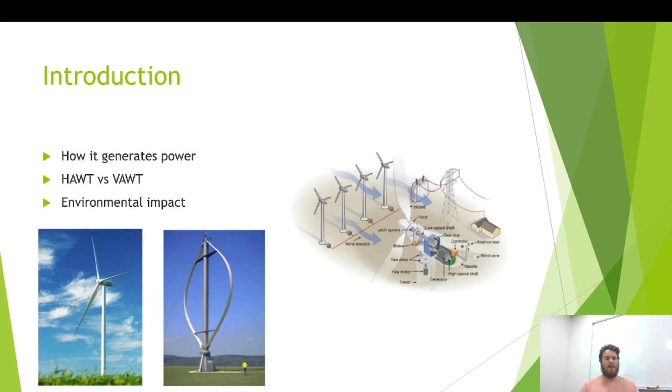So we had three original designs for our blades. As you can see, design one's on top. It was an 8-inch blade that uses airfoils that decrease in size as it goes along the length, with a 0.45-inch rod that connects to the hub. Our second design is more of a claw design that also uses airfoils that decrease in length as it goes to the tip.

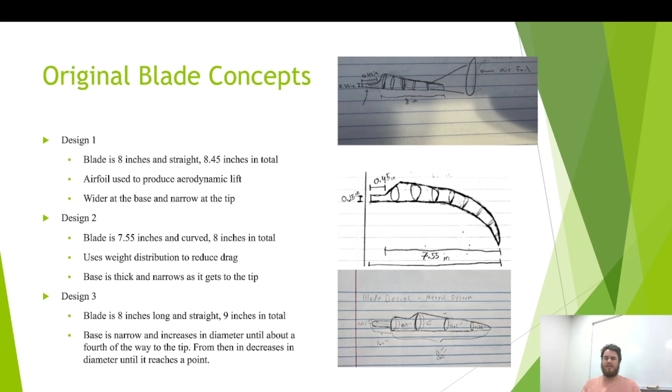And then our third design was thin at the base, increases in diameter about a fourth of the way to the tip, and then decreases in size until it goes to a point around 8 inches long.

So I created the blade by first creating a 1/4-inch circle at the origin, and then I created 3 datum planes at 0.45 inches, 3.45 inches, and 6.45 inches. And then I drew 3 airfoils on the datum planes of decreasing size. And then I used a swept tool to sweep the edges so it all connects. And then I extruded and blended the edges of the circle into the blade.

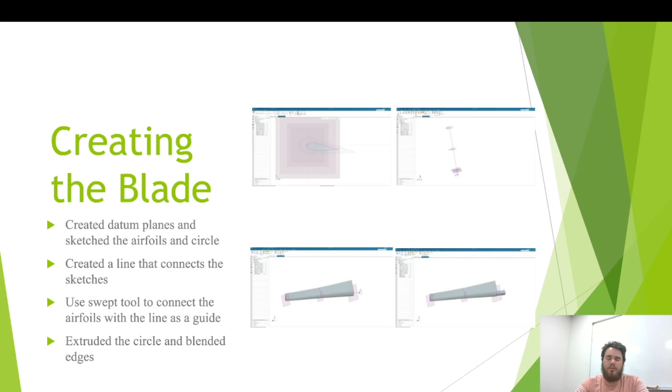For printing these blades, we had some issues with the first blade. First of all, we printed it on its side so that the support materials actually stuck to it and we couldn't get them off. And also, one of the corners was bent, and we determined the blade was also too small. So for the second print, we increased the size, the thickness, and then we also printed it on its spine so that the support material wouldn't interfere with the sides of the blades.

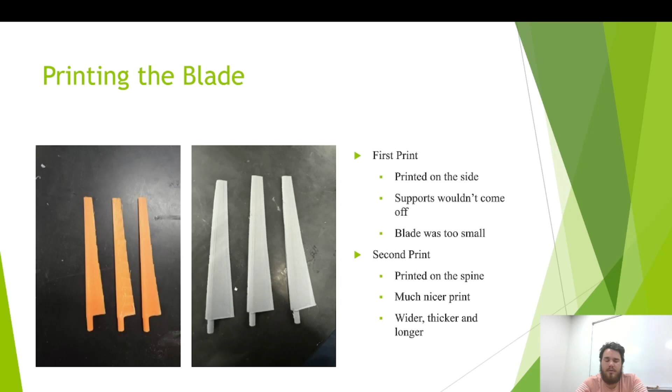So after extensive testing, we determined that our original blade concept was not producing the desired output power. So we were forced to alter our original design. Through testing, we found that using the trailing edge as the leading edge produced significantly more output power. We think it's because it's a sharp edge, which cuts through the wind better.

So in our new design, we used this information for our benefit. The new design uses a sharp leading edge along with a sharp trailing edge and a much thinner blade, and also shorter to reduce the weight.

I designed it by creating a 1/4-inch circle with 2 datum planes that are at 0.45 inches and 3.45 inches, and then drew a needle-like design on the first one, and then a similar needle-like design, just half the size. And then I drew a line that goes through both of them, and then used a swept tool to connect the two, and then extruded and blended the connecting rod to it.

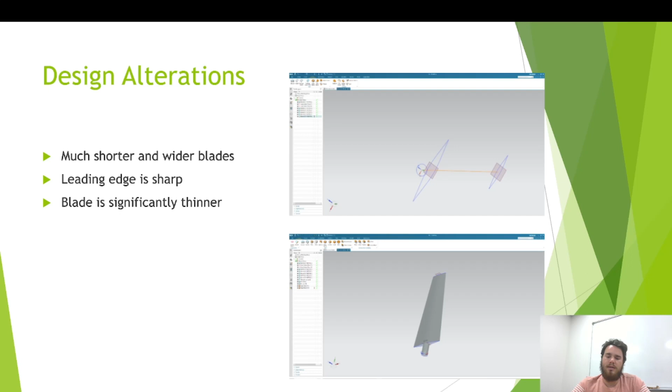So for new alterations to our blades, we had some issues with printing. My original thought was to print the exact way that we printed the other blades, where we print it on the spine. But considering the fact that the spine is now a sharp edge, it did not have enough supports to support it, so it fell over mid-print.

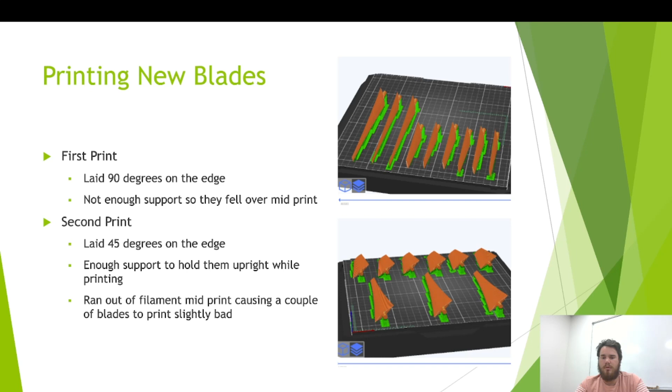With this final design, with the shorter, thinner, and wider blade along with the sharper edge, we saw a significant increase in power. These blades were designed to go really fast.

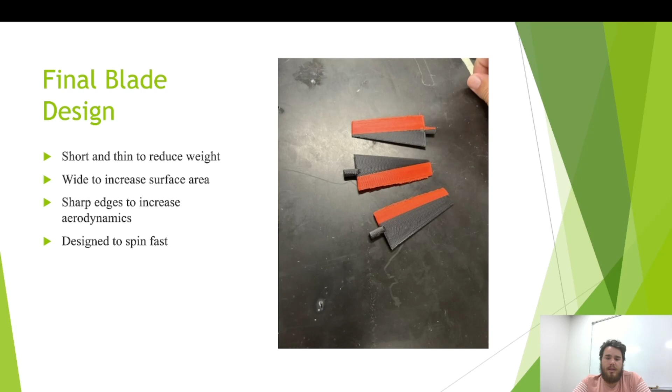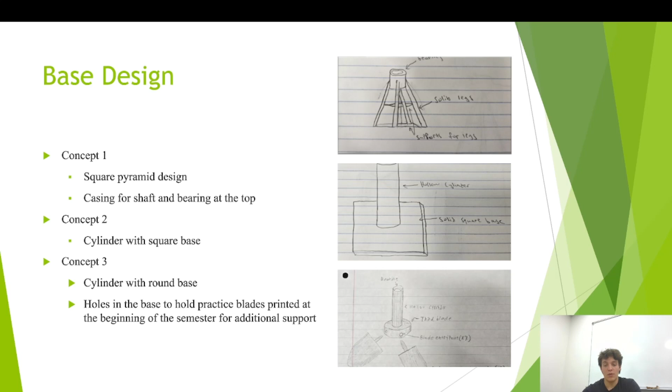As for our base design, we had three main concepts. The first of which was a square pyramid design with a casing for a shaft to go through, which would be able to hold the blade hub and spin. And the second design was a square base with a hollow cylinder on top. And the third design was a circular base with three holes in order to hold the blades, which we previously printed, which would act as legs for the base.

As for which one we selected, we decided on choosing the cylinder with the blade legs as the bottom, as that one was the most efficient with our print time, as well as having a very stable base.

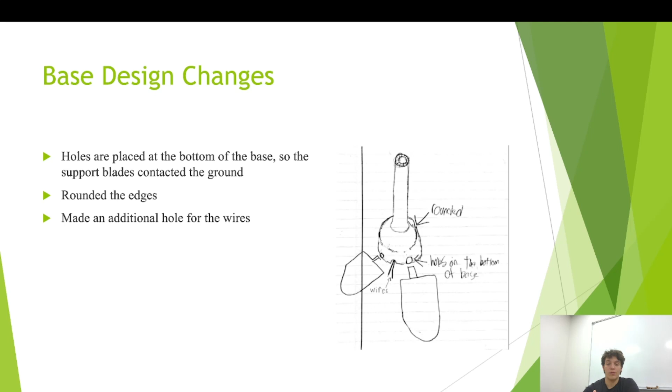Creating the base in CAD involved creating the sketch for the bottom of the base and extruding that, as well as creating the sketch for the hollowed out cylinder. Those were fairly simple, but it became rather complex when we introduced the holes in the sides of the bottom of the base.

That required creating a datum plane on the plane of the bottom of the base, and creating it such that it is about a ½ inch lower than the plane itself, and then creating an intersection curve between that datum plane and the face of the extrusion, and then creating a pattern of the points along the edge of that intersection curve, and then creating holes from those points.

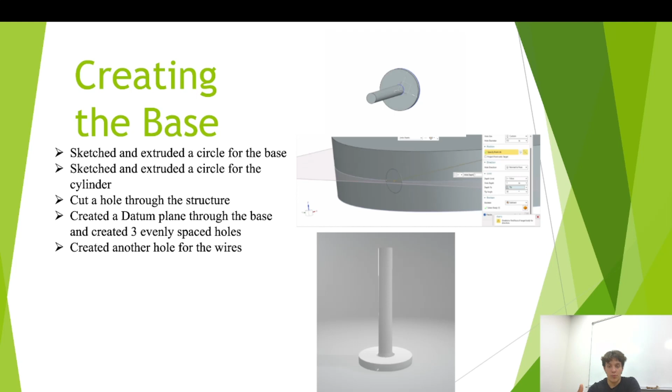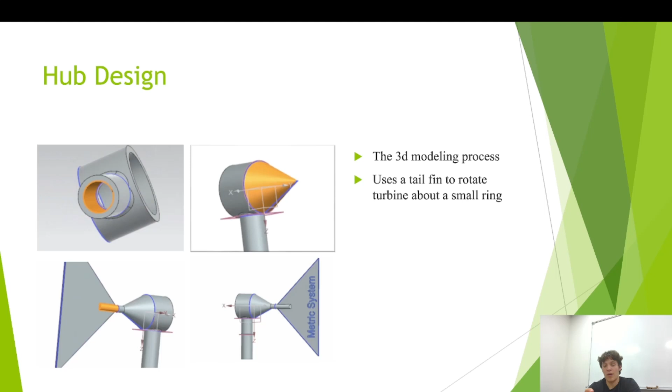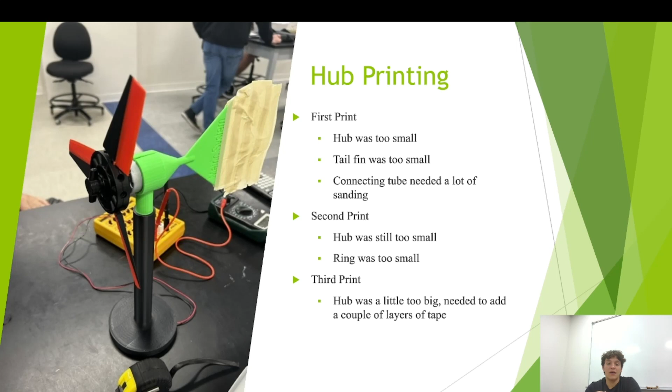As far as printing the hub, it went poorly the first two times because the areas to hold the motor were too small, and for the shaft it was too large. So we needed to remeasure and reprint in order to make those fit properly. The second time we tried it, it also did not work. So the third time around, it worked well, but as you can see, the hub space was too large, so we just needed to fill it in with a little bit of tape.

For our final design, our hub design changed to meet different requirements. We had to increase the diameter to fit the motor. So the first couple of designs that we had, the hub ended up cracking because our motor didn't fit in. We kind of tried to force it in. We also had to decrease the size of the tube, which is kind of the extender that was on the bottom of the hub. It did not fit into our base design as intended at first. It was too narrow on the inside of there, so we had to lower the size of the tube.

For our blade design changes, the initial design of the original blade was not producing the output power that we liked, so we had to shorten up the blade and change up the design a little bit to increase power output.

Reaching the final blade design, we had to go through around 4 to 5 different designs in total to get to our final design. We had printing issues with that design because we didn't correctly place the blades into the software. We had them set up, and the different kinds of supports that we had also did not work, so it ended up tipping over and messing up the prints for all the blades.

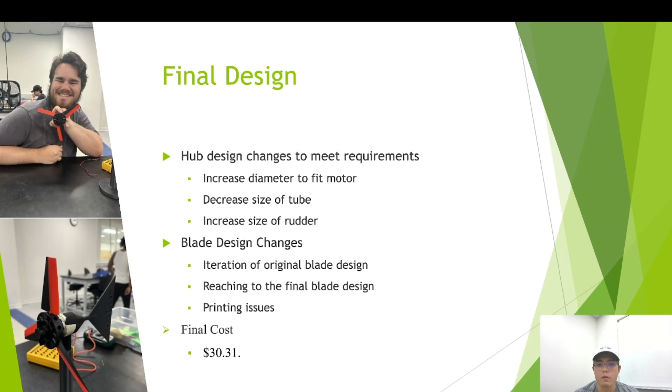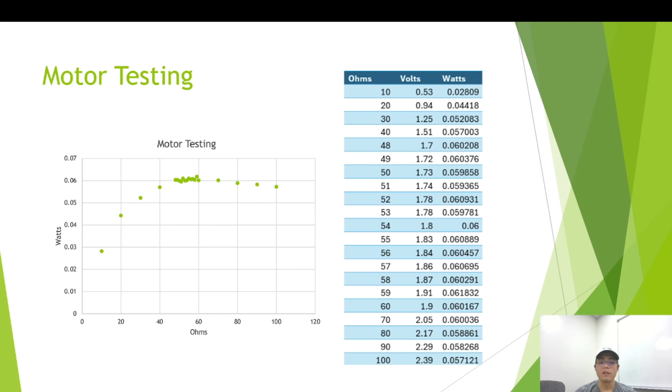This slide here shows the motor testing that we did to try and figure out what kind of resistance produces the highest power output. We had a consistent stream of energy flowing through our generator, and we tested different numbers of ohms from 10 to 20 to 30 to 40 all the way up until 100. From 40 to 60, we found that we had the highest power output. And we went by one, and we figured out that 59 is the highest number of resistance that we can have while also having the highest number of watts.

This next slide, we did the same sort of testing with our blade design. We hooked up our blades to our blade hub, and we went around 4.5 to 5 feet, depending on which one we had to do for our final design, which ended up being 5 feet. And we tested the amount of power output that we got from the different blades.

Here shows the different ways that we set the blades up. We did have different angles. We did not record those, but we had different angles set up, and we deduced that the counterclockwise small three black and red blades produce the highest power output.

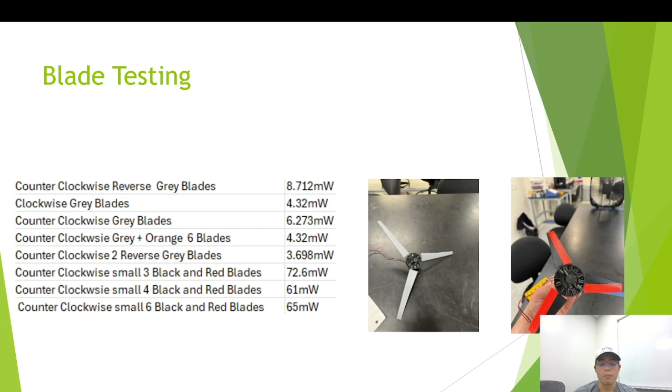To conclude the project, our biggest goal throughout the design process was to produce the highest power output that we could, while still brainstorming new ideas for our design. Our initial focus was on our base iteration, which was our old printed bases that we had before this process started. These blades were meant to increase the stability of our base design while also reducing the total print time, which in turn would also reduce the total cost. So this design helped us with 3 or 4 different criteria that we were forced to meet. Our base design was mainly focused on maximizing support and reducing total print time.

For our blade design, we had a bunch of changes. We were basically just messing around with them until we found the highest number of volts that we could with the resistance that we had. We had around 4 to 5 different final blade designs, and we finally decided on our half red, half black blades that produced the highest power output.

Our hub had a few different problems. At first, the part of the hub that connected the DC generator to the hub was not big enough, causing a crack in not only the first, but also the second design that we had. Our first design's rudder was also not big enough, so we had to attach tape back there to see if we needed a bigger design, which we did. So we ended up printing a bigger rudder also.

During our testing phase, we started off with no hub or anything because we did not have that printed out and set up yet. So we tested it with just the blade hub, and we were trying to figure out the highest power output from that. Our power output started low with our first initial blade design, but after we introduced new blade designs, we showed a lot of improvement in our total power output. We noticed that the biggest thing was the actual blade itself. It wasn't the base design, but it was the blades and how they were angled that affected the power output the most.